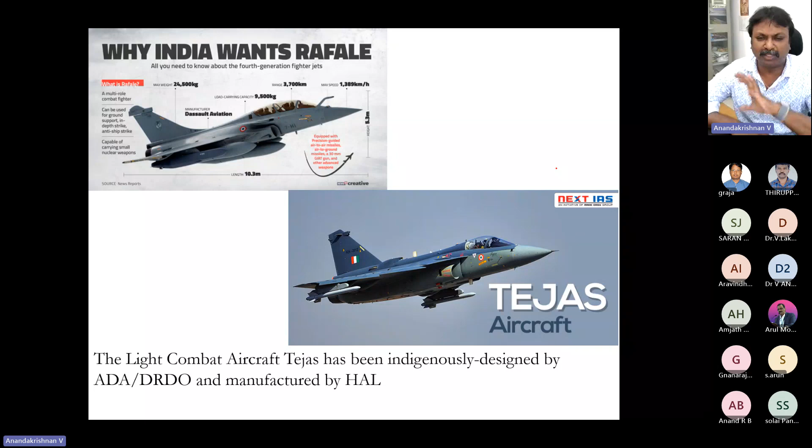The Tejas aircraft is a light combat aircraft, LCA, indigenously designed by the Aeronautical Development Agency, Defense Research and Development Organization, and manufactured by Hindustan Aeronautics Limited. A lot of DRDO labs are utilized in making a lot of research, building the total mission of this flying machine. But if you see in engineering, it also takes part in some of the financial things.

When you think about the economy of buying a Rafale or making our Tejas, there are a lot of comparisons done on the World Wide Web, and you have the liberty to Google and find out the difference between the Rafale and Tejas by performance. So in a way, some websites have given ratings.

But at the end, when you think about the cost of buying one Rafale, we ourselves can produce more than 4 Tejas. That is because we are not just buying the material, not only the engine, not only the machine, but we are also paying for the technology behind it.

At the end, if you also think about the engine, we have the Tejas aircraft, but the engine is not developed by our own defense establishment. The engine development is still going on, very slowly, over a very long time. It's not so easy for a flying machine's engine to get certified, so General Electric's engine is now being used in the Tejas.

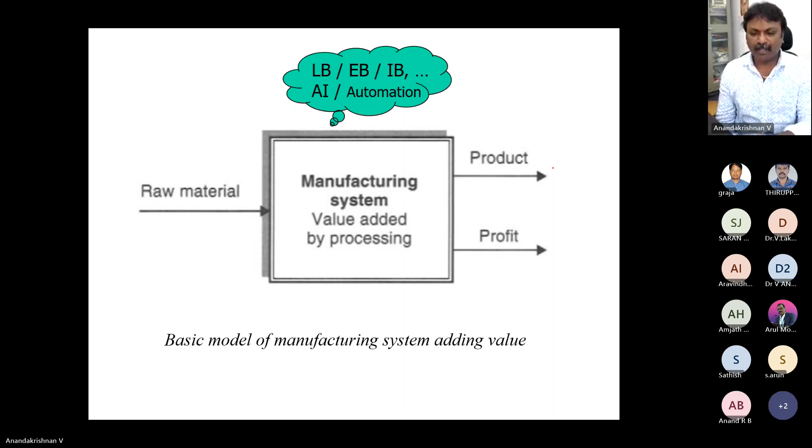So this is not by mere assumption. I've come across some books discussing the importance of manufacturing. Despite its decline in the 1980s, UK and US became fully developed countries in those years because millions of people were directly involved in manufacturing. Some statistics say from 1999, 20% of the GDP accountability for UK was given by 4.3 million people. Likewise, in the US, 17.8 million people were working in manufacturing.

Now the scenario has shifted. We don't want the number of people to be counted anymore. We need automation, full automation. You can manufacture any kind of thing with technology with reduced manpower. So it doesn't mean more people make a country developed now. Any country with the capability to automate industries, Industry 4.0, and give the highest productivity through manufacturing technology, that country will become a developed country.

So what is subtractive manufacturing? This is the traditional method. Actually, there's a small misunderstanding among young engineers. What they feel is that 3D printing is some heavenly process, that any kind of component can be manufactured by this additive manufacturing. I'm not going to accept such a hypothesis.

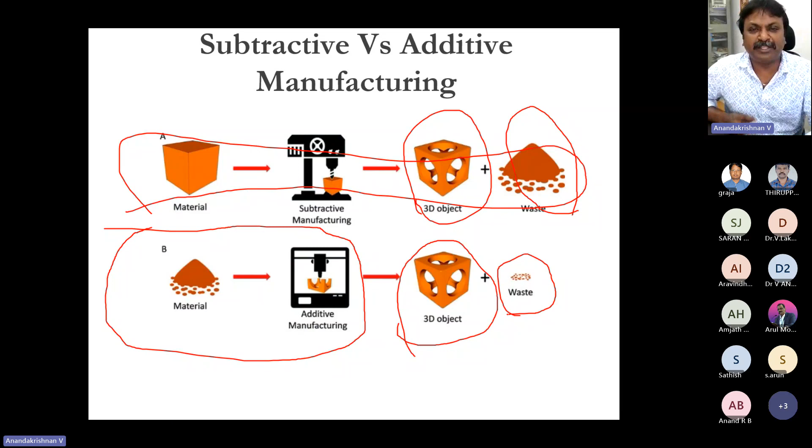Simply speaking, additive manufacturing is an appropriate name given for layer by layer building of material. The material may be plastic, metal, concrete, or anything. In the near future, like a CT scan can scan anybody's lung, if you have the biomaterial to manufacture any lung of a human, and a technology to deposit that material layer by layer, you can create any complicated shape, even the very fine details of the alveoli sacs and lung, whatever the airways, everything can be easily scanned and 3D printed.

The scenario is something we will very shortly face or see. To make that, you need a 3D model of the component. Whatever the component we are going to manufacture, we need a 3D model.

There are plenty of sophisticated software available, and there is even reverse engineering by which we can scan, make 3D cloud data, and create the component as any kind of three-dimensional object. Once these three-dimensional objects are obtained by means of a CAD model, we go for layer by layer slicing, and this sliced data is given as input to an additive manufacturing setup where the manufacturing can be done layer by layer. So this is how additive manufacturing works.

There are majorly, if you see, some process categories in additive manufacturing. One category is powder bed processes. Here the powders, meaning small particles of material, have particle to particle attachment made either by a laser source through sintering. Sintering means not melting into a molten state but a semi-solid state - you heat one particle, and another particle attaches. Sometimes we melt by laser melting, or we can go for electron beam melting. So by applying different kinds of technology, you can melt a small particle and join particle to particle to create one layer.

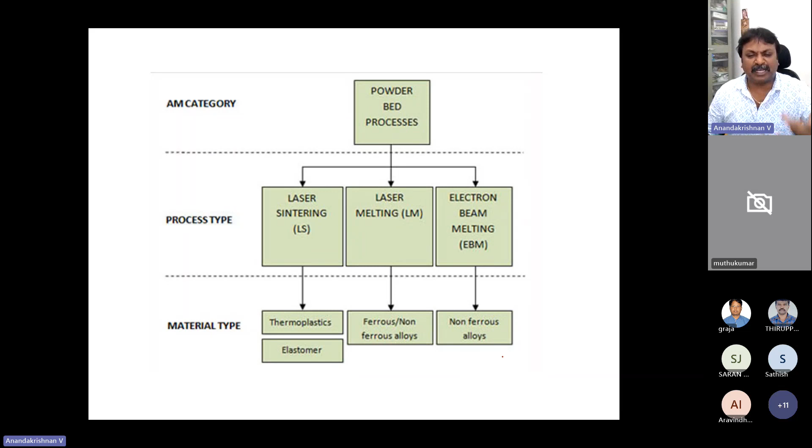Once one layer is manufactured, what do we do? We go for the next layer. So layer by layer additive manufacturing can be done with powders. Regarding material feasibility for this kind of process, it can use any kind of plastic, elastomer, or ferrous, non-ferrous material - anything can be done.

The second major category is material deposition processes. Here the material, sometimes by powder, you blow the powder - you have some space, you blow the powder, and then you define whatever cross section you want for one layer, blow another layer of powder, and create the cross section.

There are plenty of techniques available for additive manufacturing. Even a lot of new processes are being developed and patented all over the world.

Then again, we can create a wire by extruding it, and then melt the wire to a semi-solid condition, and deposit whatever shape you want to create a three-dimensional structure. We call this free forming also.

Sometimes we go for an extrusion process. You can have metal pellets, make the pellet go through a nozzle or extrusion chamber. It extrudes, making it into a semi-solid or molten condition of wire material, and then we can deposit it. Here also there is no limit on the types of material used - ferrous, non-ferrous, or thermoplastics. Any kind of thing can be done.

So I want to differentiate a powder-based process and a wire-based process. In a powder-based process, only very small components can be made. Usually small components, because imagine you are going to print a large engine block of a four-wheeler - what would be the volume of powder needed? Those powders have to be procured or manufactured by some other process.

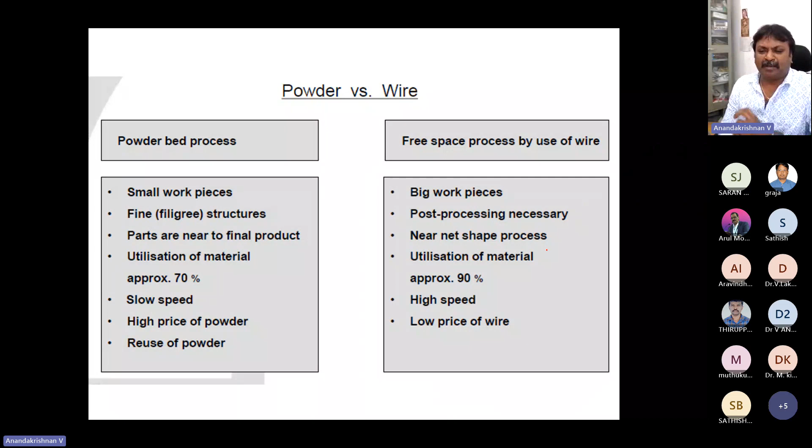So here, if you see this, when you go for a multi-layer deposition by means of a wire-based deposition process, these layers are not quite good in surface finish. You have a lot of extra projections. So it is not a good idea to get the exact shape this way. The control over a powder-based process is quite good, whereas with this wire-based additive manufacturing process, you need to go for post-processing, one for geometry, as well as metallurgically, we need to uplift the material for the required performance. When we think about it, it's very high speed because it can deposit 9 kilograms per hour, but its price is very cheap if you think about the cost of wire.

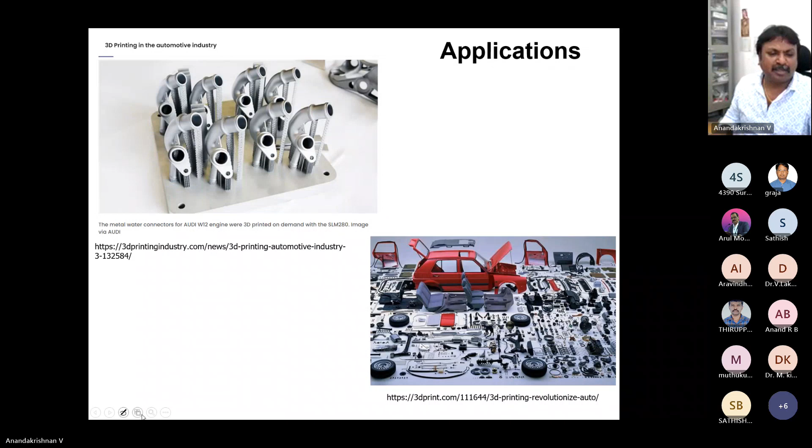If you see here, the metal water connectors for the Audi engine were 3D printed. You can see over here another major issue. If you think about here, you can see these honeycomb structures, or some structures constructed from the base plate to the component. Those are your support structures. Whatever the support structure, you need to design it depending upon the component's complexity and the plane of presentation of individual layers. We need to construct or prepare some support structure to overcome this kind of component issue.

So this support structure design requires a lot of software. I was also working with one of the scientists from C-MET to develop some of the support structure design software. Now, at present, for example, there is a software called Materialise Magics, sourced from Belgium. In NIT Trichy, we have a 3D printer machine for that. It costs around more than 10 lakhs for one version of the software. It helps you design this kind of support structure when you go for powder-based additive manufacturing. There are a lot more parts available to revolutionize additive manufacturing in automotive industries.

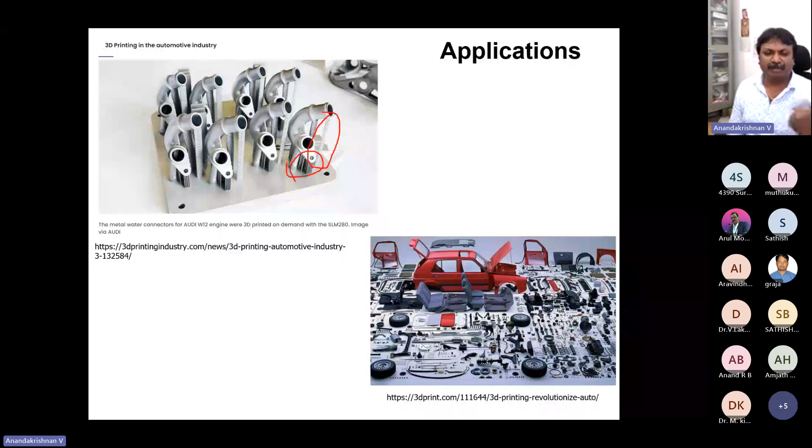When we talk about applications in case of turbine rotors in aerospace engineering, you see most of the repair works. Earlier, you can see over here, some repair works have already been done, right? Repairing that particular point and then again machining. You can also see some laser-based deposition taking place over here, and these are some of the wire-based deposition processes to correct the wear and tear of repairing a damaged part. And these are built up.

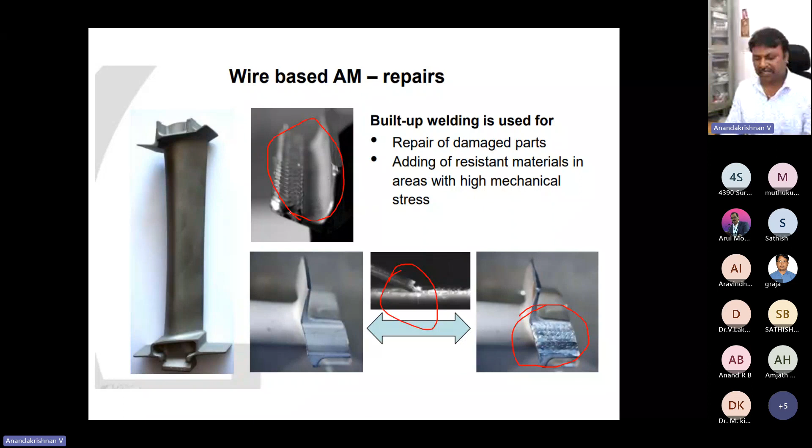This is an additive process. We are going to add some more material where it got worn out, and then we will deposit that material and then machine it. These are the things wire-based AM repairs have done. And these are some of the other areas of near net shape technologies, which can be used for manufacture, repair, surface treatment, or rapid prototyping.

So all these areas are being covered by this kind of additive manufacturing. Let us slightly discuss electron beam wire additive manufacturing. This is another part - wire powder-based additive manufacturing involves spreading powder and using a beam to create layer by layer.

Here we are going to introduce electron beam welding. We will have a wire feeder and a source of electron beam to melt it and deposit layer by layer, so that you can create whatever shape we want. So this is one of the setups, right?

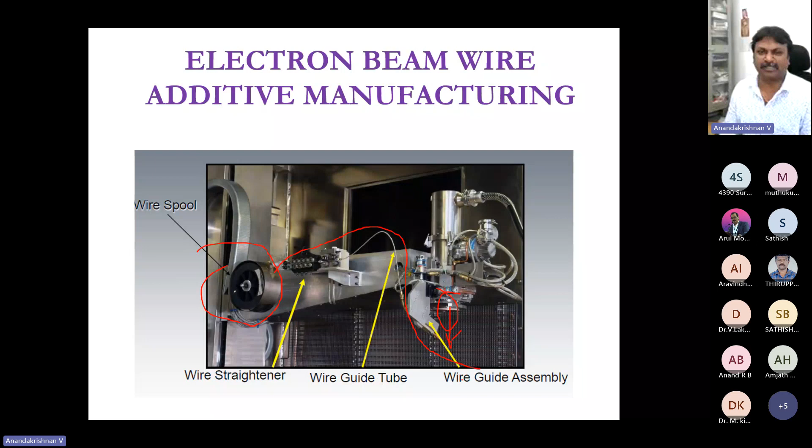A wire spool is available here. The wire is fed through some guideways and comes out, and we have the electron beam source focusing downwards. We have to have a CNC system to move your component in the X, Y, Z system, and you can also use multi-axis robots for making any kind of relative motion to obtain any kind of shape. It's possible with electron beam wire additive manufacturing.

The advantage of this wire-based process is, as I told, a very high deposition rate of 9 kilograms we can deposit. Moreover, when electron beams are used, usually the component is kept in a vacuum environment, which assures cleanliness. Most aerospace components and other highly reactive materials like titanium, if deposited inside a vacuum, will have a much greater advantage. It's an important factor essential for aerospace applications.

The disadvantage is the cost of this machine. For example, the machine I show here was procured at Gas Turbine Research Establishment, Bangalore. It costs around 17 crores to bring the machine onto the floor of that particular industry. So electron beam is costly equipment, and there's also the size of the vacuum chamber. Suppose your component is very large, like large engine blocks of heavy engines - you have to make the entire chamber vacuum, which itself takes a lot of time, and then creating the component inside. These are some of the disadvantages.

So a quite lower cost type of additive manufacturing can be performed by wire arc additive manufacturing. You can use a wire and deposit layer by layer by means of a MIG welding process, or you can have a TIG welding process - any kind of material wire melting and deposition process using a CNC system. You can usually create this.

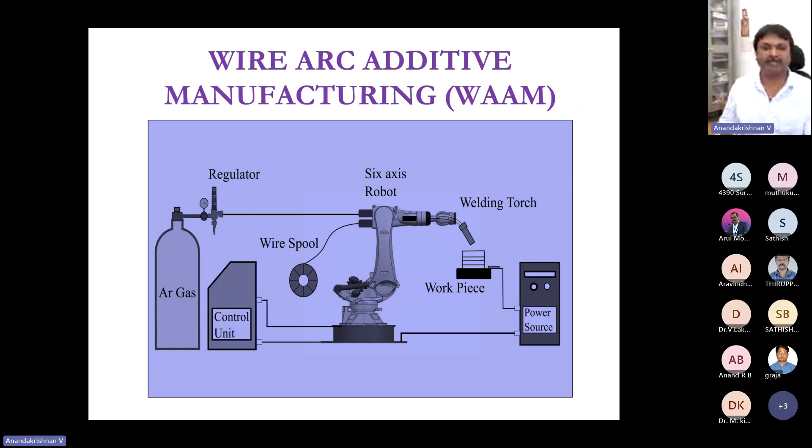The advantage here, compared with the electron beam process, is that we don't want a chamber or vacuum or this kind of environment. You can easily do it in open space - a very simple and cheap process.

And the disadvantage is properties non-homogeneity. As I told you, bead over bead deposition causes some non-homogeneity metallurgically, which modifies the properties mechanically - it gets modified. So the control of material deposition is another hectic process, right?

For example, usually when we deposit material to create these kinds of features, you can see these are wire-based additively manufactured compound features. You can see the waviness here, because layer to layer can be easily visualized. And imagine if you are going to manufacture a component of this size with this much surface waviness.

It cannot be directly used in most conditions, so you have to go again for a subtractive process. A subtractive process can never be thrown out of the domain of a manufacturing engineer. We have to depend on surface machining - again you have to go for rough machining and fine machining, and then surface finishing processes, super finishing process, or something else you have to depend on.

This is about the electron beam additive manufacturing in action in that particular machine, what I told. The process of wire-based additive manufacturing highly relies on the shape of the beads, right? We are going to create one bead of material deposition, then another bead of material deposition. In a way it gives layer by layer deposition - that's why the waviness.

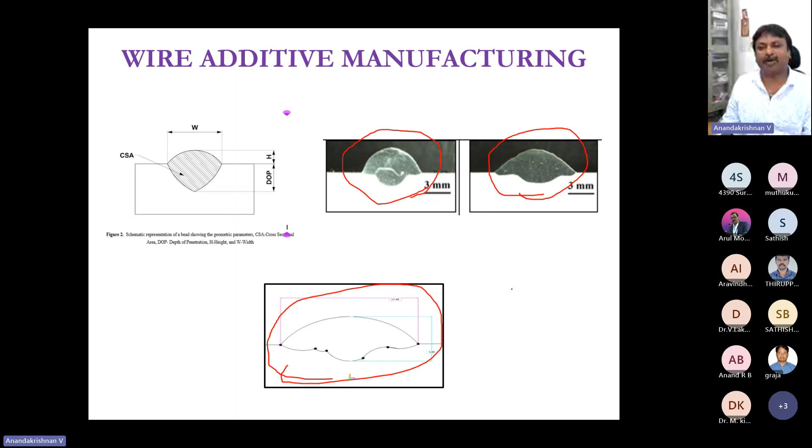Here are a few sample snapshots of electron beam additively manufactured layers. You see different parameters: parameter set 1 gives this kind of geometry, whereas parameter set 2 gives this kind of deposition for a single layer. Now look at the third one—it gives too much melting and dripping of the molten metal under the base.

So optimizing parameters to get a particular geometry is another task, and a lot of research is going on regarding what parameters need to be set for a given material to achieve a particular wall deposition width. You can see here, to obtain a component like this...

The first stage is creating the part by additive manufacturing, then going for subtractive manufacturing. Recent days, there are hybrid machines—in the same CNC system, one deposition head will come and deposit, then another machining head will come and machine. You can check through a lot of videos available on the web for that.

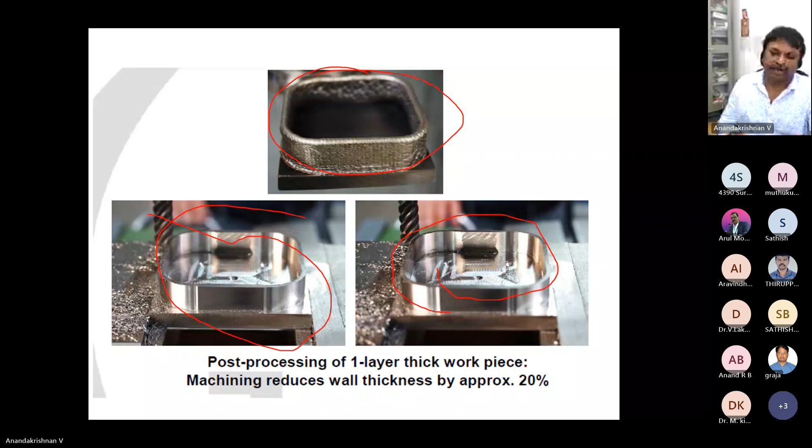Another challenge: when depositing material from left to right as shown on screen, if you check the height at the start point versus the stop point, there will be a difference, because we move left to right, stay there briefly, then go right to left, retracting the deposition torch. To overcome this, some people try directional change—first deposit right to left, then left to right, then right to left again. This is research work already being performed.

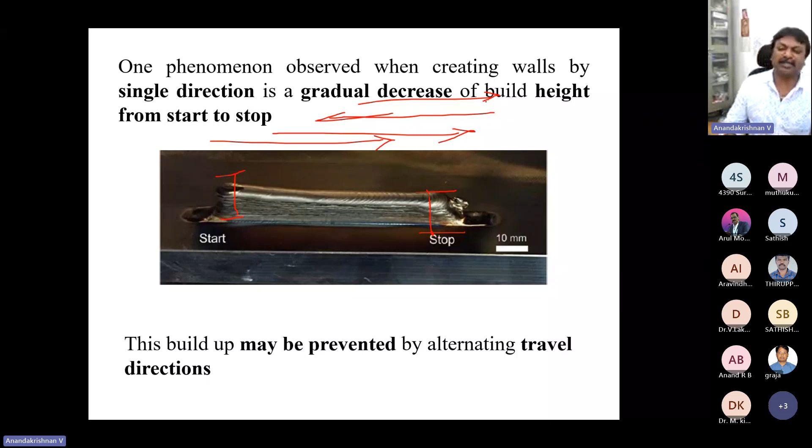Once the component is built, we wanted to find out how much non-homogeneity exists inside it. For this research, we used a CNC electron beam additive welding machine as the additive manufacturing setup, and these are its process capabilities.

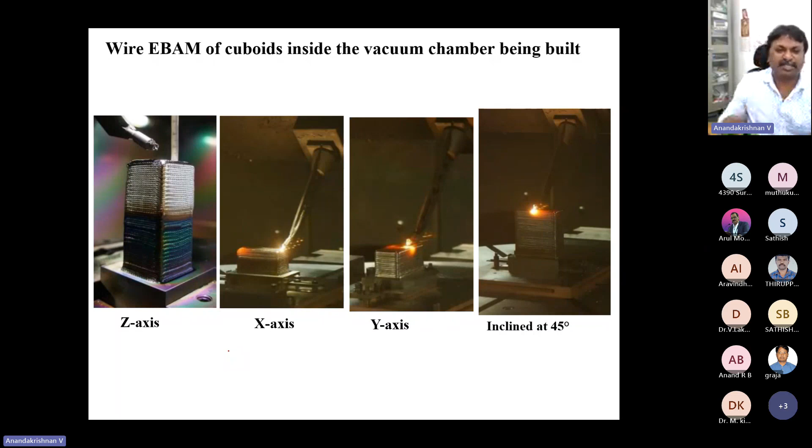Some components were made for a research project with the Gas Turbine Research Establishment. We extracted samples like this: one oriented along the z direction, some along the x-axis, some test coupons at 45 degrees to the xy plane, and some along the y-axis. So four sets of samples were extracted from these four different kinds of depositions, and these extractions were carried out.

You can see the build geometries built for various processes. Using a wire-cut EDM machine, we extracted samples along these directions and subjected them to tensile testing. The area under the tensile curve gives the toughness. There's a difference when the z-axis is the standing direction versus when material is extracted along the layer-laying, layer build-up directions.

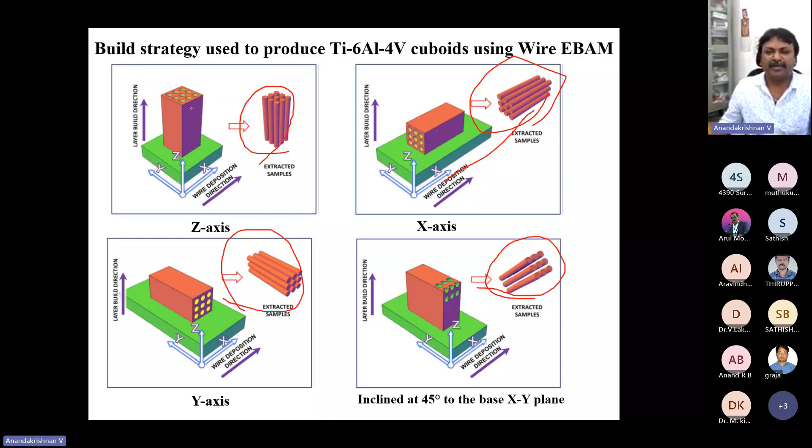So there are several reasons we wanted to find out why there's a change in different directions. For any component—say you want to build an automotive engine part or something else experiencing different kinds of forces—you have to be very careful about choosing what direction to orient the component, or in what direction to extract it.

So this is what I thought of discussing about wire-based. The next one is the Nirbhay, an unmanned air vehicle.

Most of you know about its range of 1,500-kilometer travel, and this is the engine available inside this. I'm not decoding anything else, it's actually available in Twitter and I'm using it for the explanation. So this is a small turbofan engine, the engine used in that unmanned air vehicle, that Nirbhay missile.

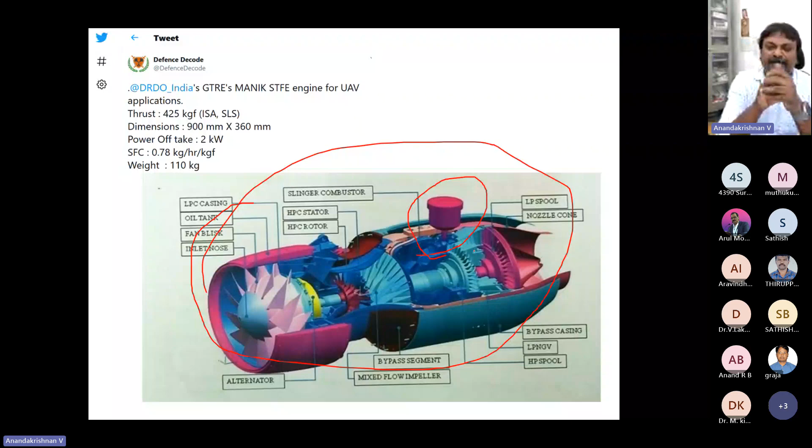Here you can see a box-like container, which is nothing but the starting nozzle. Usually for crank starting this kind of high turbo engine, we may use something like a propulsive starter. We have some propulsive material compacted in a small nozzle chamber, and then we ignite it, so there will be hot gas coming out with very high velocity, hitting on these rotor plates, and then the rotor will be rotating.

We need almost 30,000 RPMs of rotation of these kind of rotor blades for this kind of flying machine, where we are going to form the trajectories. I will play a small video for this one.

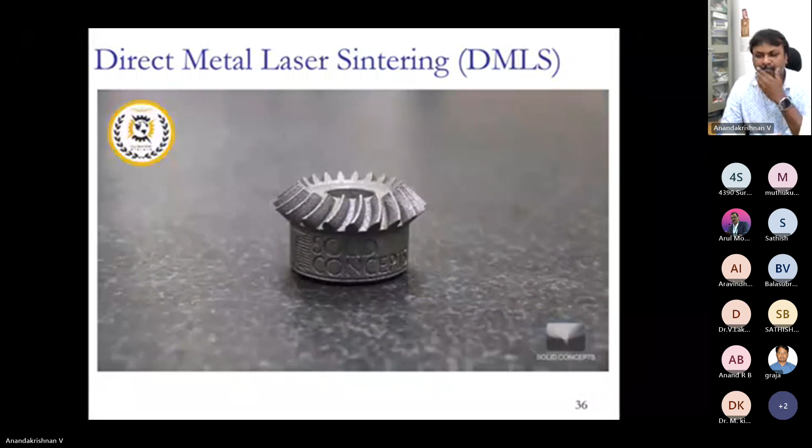That's the process by which most automotive and aerospace three-dimensional components are built. The video shows we give a command, we have the object sliced, and you can have the manufacturing. I was also happy to see that.

But NIT Trichy Center of Excellence in Manufacturing has got one 3D printer, and Dr. Duraiselvam, being chairman, purchased this one for some 10 crore rupees. There is equipment, but what happens when we go for 3D printing of whatever material?

One major thing is, in any additive manufacturing or 3D printing machine, whatever powder is provided by the equipment supplier, we need to use it. If you use some other powders, you may end up with different kinds of complications. One layer of powder will be some 40 micron layer - we create one 40 micron layer, then lower the bed and again create a 40 micron layer.

Suppose you see figure number 1 here - what happened actually is, during the halfway point, it got detached from the base and it got warped. The powder being spread by means of a very fine blade, which may be made of rubber or some polymers, and that wiping blade mechanism will get damaged. It may cost a few thousand, or it may go to lakh rupees for replacing this kind of equipment.

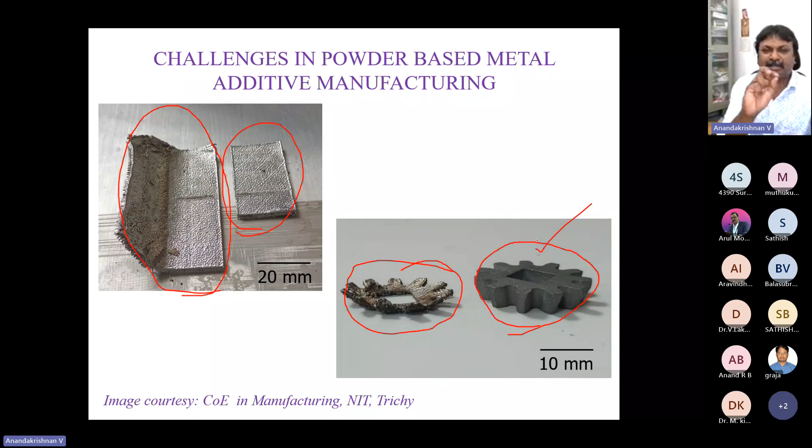So the parameter again is very important. These are some of the challenges in powder-based additive manufacturing. Hope I'm not taking too much time - I will slightly skip some of the slides because of the technical difficulties we faced.

One needs to understand the characteristics of the powder is very, very important. This additive manufacturing is nothing but an advanced process of powder metallurgy. Powder metallurgy process is a very good old process where powders are being mixed, and then whatever different kinds of components you want, it is pressed into the required shape.

Then it is kept inside a furnace for heating, to bond the powder particles. Thereby, large amounts of small intricate components have been manufactured for a very long time, using very little material, usually for automotive industries or household appliances and different applications.

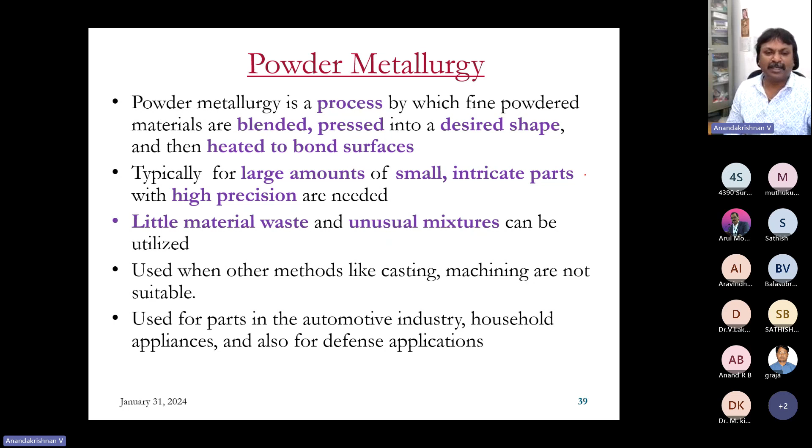This applies to metal powders which cannot be easily machined, melted, or cast, like tungsten carbide. These powders are even used in the Tiruchirappalli Ordnance Factory, the Heavy Alloy Penetrator Factory, where they use tungsten material to create rods for penetrators. These are made with powder metallurgy, and the process is well established: mixing the powder, forming it to the required shape, and then sintering it, heating it so the powder particles get fused, before going to different processes.

In powder-based additive manufacturing, the properties of the component highly depend on characteristics like the chemistry of the powder, purity of the powder, particle size, size distribution, particle shape, surface texture, and all these things.

Any alloy can be converted into powder, whatever the combination. But does a metal 3D printer have all the parameters for any kind of alloy mix? No, it is not 100% available. There is very limited research capability with a few of the 3D printers. They experiment to find out the parameters with which they can melt or add particle to particle, and they work on it.

Regarding purity: the process by which powders are manufactured is very important. For example, in an atomization process, molten metal is poured inside a small tundish, and through a small hole the molten metal flows. In a controlled atmosphere, if you spray cold air or water all around, you get separation of particles.

It's like blowing a candle - the molten wax spreads into small particles. Or sometimes you can have a consumable electrode, a consumable metal spun off in a spindle, with a non-rotating, non-melting tungsten electrode creating an arc. The material melts, and due to high rotational RPM and centrifugal forces, the particle disintegrates at the periphery, on the radial surfaces, and you collect it inside a chamber by cooling it down.

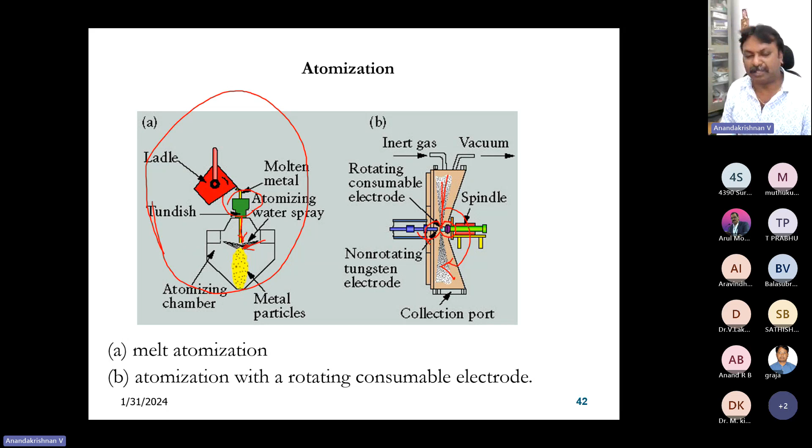So this is an atomization process. There are plenty of other processes like chemical reduction, electrolytic deposition, pulverization, thermal deposition, precipitation from solution, or condensation of metal vapors. Any metal can be converted into powder - this technology is already developed.

Depending on the process by which you create the powder, the shape varies. Some are one-dimensional powders - they may have an acicular shape. A chemical decomposition method gives you an acicular shape, an irregular rod shape, or a two-dimensional flake shape, while an electrolytic deposition method gives you a dendritic shape. Or you can have three-dimensional shapes like spherical, rounded, porous with small holes inside, or irregular shapes.

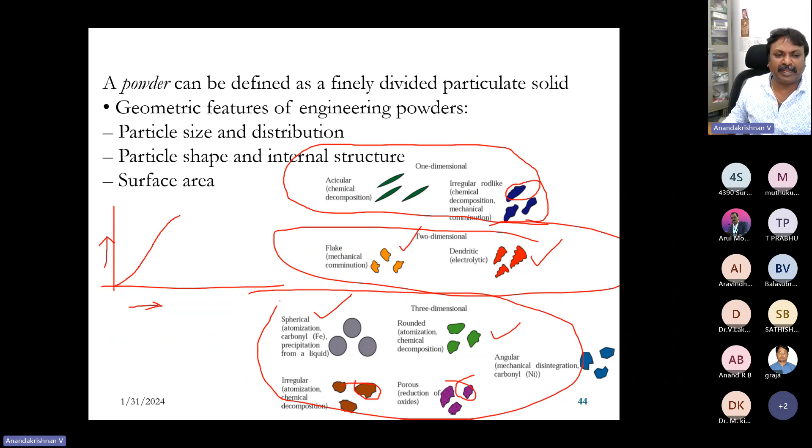If you plot particle size - taking the frequency or number of particles in a known quantity on the y-axis, and particle size on the x-axis - you should get something like a normal curve. What we need is small particles in little number, medium size particles in very high numbers, and large size particles in quite lower numbers. This gives a normally distributed particle size shape.

With adjustments: suppose you take a container and put larger size balls of the same size in it, you will have a lot of cavities, a lot of porosity. But if you spread particles of larger and smaller sizes together in a container, you can have uniform filling. This is what's called apparent density - how you fill the powder particles. You can easily imagine this one.

If you are spreading same size particles, or smaller to larger normally distributed size particles, the spreading will be more uniform. So how to manufacture it, how to find the size, how to mix it, how to bring it - that's why it is very expensive.

And the particle shapes matter - suppose one powder particle's position is different from sphere to sphere, so interlocking will occur. One particle needs to slide with the other particle. If it has crest and trough, irregularities on the surface, another powder particle cannot slide over that when you are spreading the powder inside a chamber. So this is very essentially important - the surface area, all these things matter about how you are going to spread the powders.

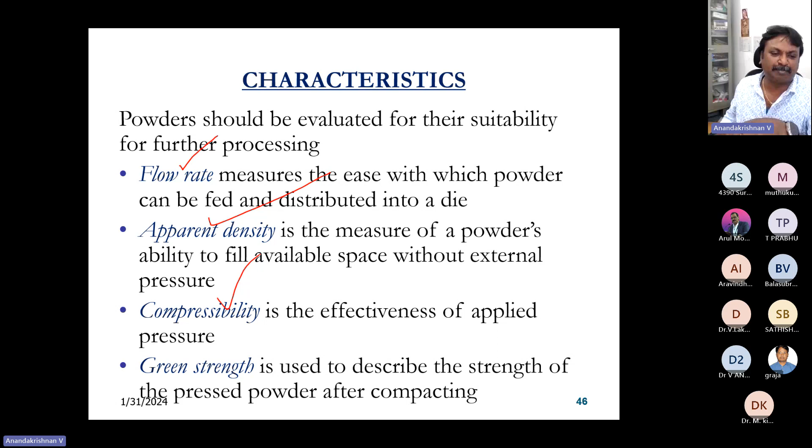Then mixing of this powder is again important. The powder metallurgy technique is a very good technique where you can add any kind of powders. For example, if you are going to create an alloy, there are limitations - you have to go for a binary phase diagram or a ternary phase diagram. What is the system, how to develop - all these things matter.

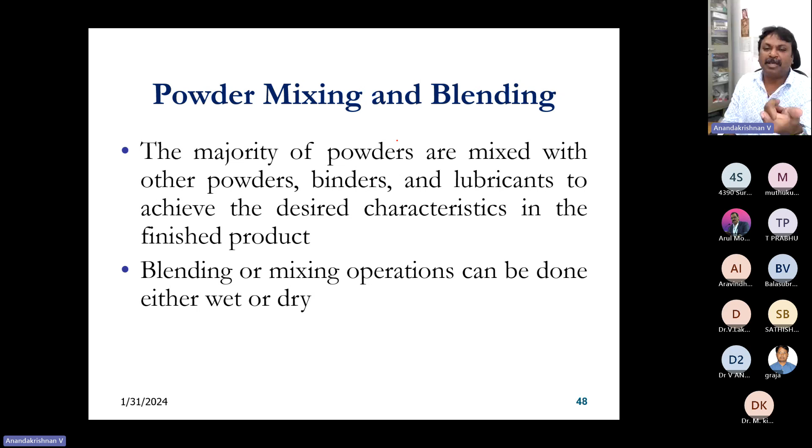But here in powder blending, you can take 50% copper, 50% aluminium, or 10% titanium carbide. You mix it together and create a consolidated shape by consolidating all this powder, and melt it at the lowest melting temperature with which it can sinter, to create components. So you've got to mix it uniformly - a lot of physical and mechanical properties depend upon the mix.

So in 3D printers, when you are using powders, we have to wear masks. These masks should protect against the powder particles. If the powder particles are less than 40 microns, they can easily float in the air. Usually nano powders can float in air. If you inhale it, it can go and soak into your alveoli sacs, leading to a lot of respiratory disorders. People may even die. So you need a hazardous environment setup - you've got to be very careful about that.

And then you cannot blend in air - sometimes you've got to blend it in an inert atmosphere. You may need a toluene-like liquid to fill. Then when we want to have a very good mix of this powder for different alloys we want to make.

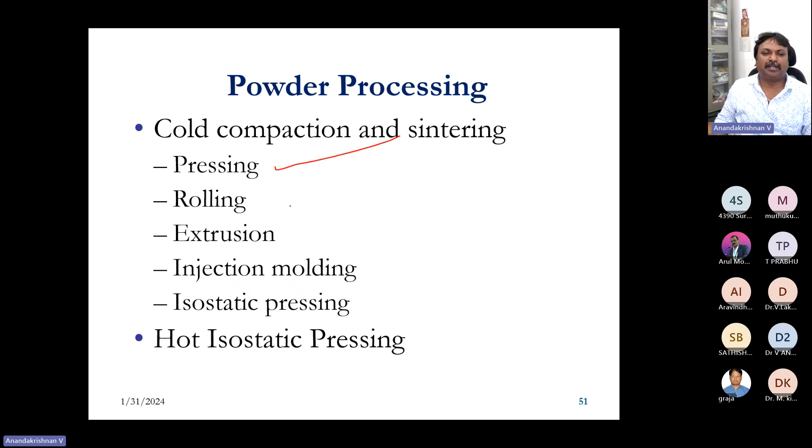So after the powders are mixed, usually in the conventional method, they press, roll, or extrude, injection mold, or isostatic or hot isostatic press it. Here are some glimpses of that.

So the loose powders are now subjected to pressure to create a component in the powder metallurgy technique, either using a mechanical press. For example, if you want to create a small spur gear with a helical hole inside, there will be an upper punch, a lower punch, and a die inside which you fill the powder. The upper punch moves down and the lower punch moves up, creating a consolidation of the powder inside, and then it is ejected.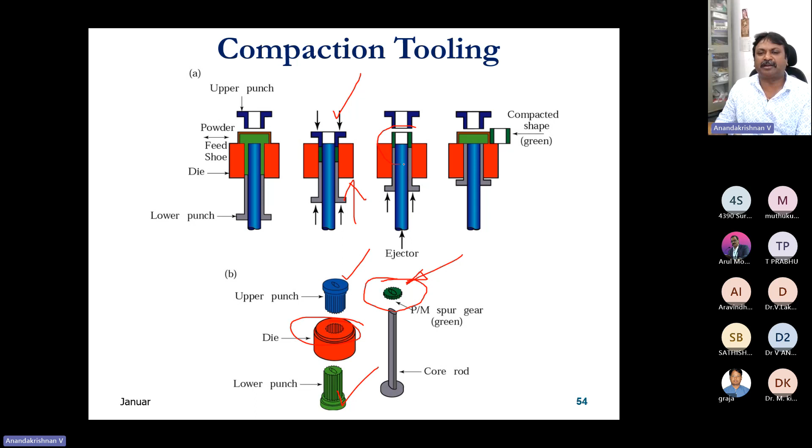I'll show the cycle: powder filling, compaction starts, compaction completed, component ejected, and then it is taken out. When you are stacking and compressing the powder inside a closed container, initially there are a lot of loose powders and cavities - pores - you can see. Then it gets restacked, and finally it will get deformed.

So the additive manufacturing setup usually is not only about powder spreading. Some of the technologies now under research involve rolling these powders to create a uniform thick layer.

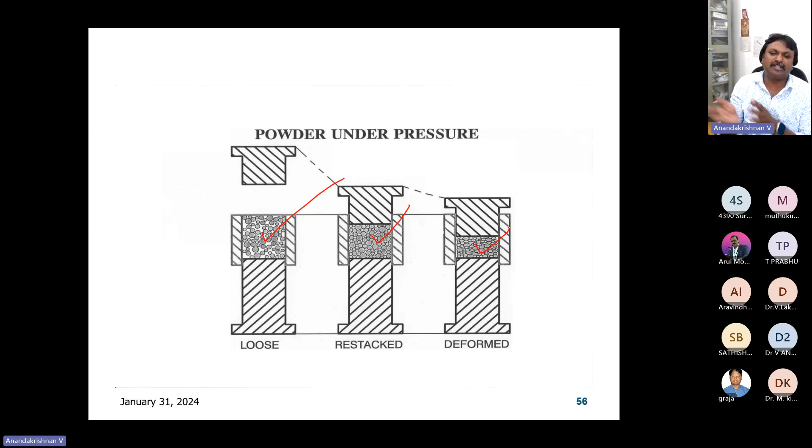So with 40 micron powders, you can roll the powder before it is being heated. This rolling-based bed fusion process is on the way, people are working on it. You need to understand, scientifically, this has a lot of difficulties or challenges in handling these kinds of small powders.

This is a conventional powder metallurgy compaction sintering process where powder is filled inside a container, a die, and there are relatively moving different parts. Why? Because if you apply pressure on a static powder from the top, the density will be higher at the top and poor at the bottom. If you apply movement from both the top and bottom, you get density variations along the axis, higher at the top and bottom, poor densification in the middle.

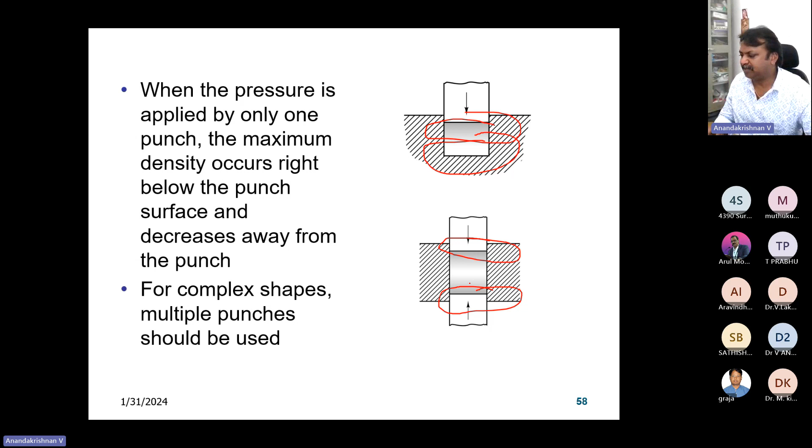This is how different die movements, punch and die systems, can help. Here there are 3 moving parts. This kind of die design can help create a uniform or homogeneous distribution of particles, so that porosity doesn't form at any particular location.

For that you can go for isostatic pressing. You can put it in a chamber, apply pressure all along, and fill the powder. For example, this is a small tube component. This central core rod is meant for creating the hole, with a stopper at the top and bottom to hold the powder inside this flexible tube.

The powder is kept inside a closed container where we increase the pressure, cold isostatically pressing it, and create the component.

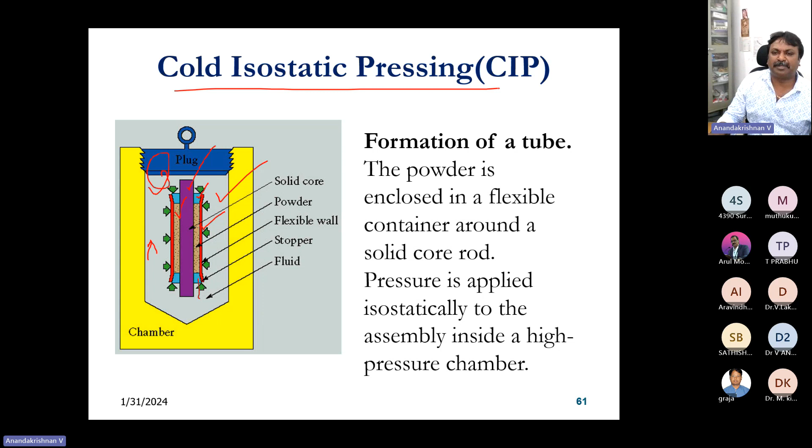Instead, people are making use of hot isostatic pressing. The powder is filled in the required shape of a can, and then it is kept inside a fluid bath where temperature increases and stays for some time, then is reduced, while pressure is also simultaneously increased, kept for some time, and then reduced.

So hot isostatic pressing - here I want to mention one important point. Powder-based additive manufacturing components cannot be directly used, because particle sizes are different. Spreading of the powders can create cavities, and layer to layer there may be non-uniformity in powder particle distribution. So under that condition, there will be some porosity, and you usually cannot have 100% densified components.

So what they do is take the component and put it inside hot isostatic pressing. After the component is removed from the base structure, they put it in and do a HIP process - hot isostatic pressing - increasing pressure and temperature so the component becomes uniform, with homogeneous properties in all directions. Only then can it be used for high wear-resistant components or bearing materials.

Powders can also be converted into the required shape by means of rolling. For example, you can have 2 rolls, and the powder can be fed in between the rolls, creating whatever cross-section you want.

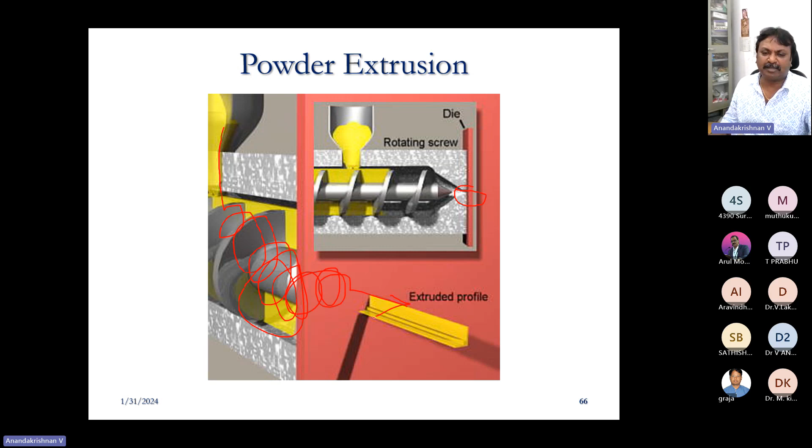Or sometimes you can pressurize the powder through a screw conveyor - this is the powder extrusion process. The powder can be extruded through a hole; it gets pressurized because of the rotating screw mechanism, and comes out in whatever shape you want.

Or sometimes people are thinking of depositing one powder mixed together with another powder to create a deposition. There is another additive manufacturing approach - instead of heating the component and joining it at once like with a laser or electron beam, there are developments where you can use polymer jets to attach particles to particles.

For example, a glue-like structure, you can attach particle to particle. So the 3D component has all the particles together by means of a temporary joint, using some adhesive or material. Then you put it inside a furnace and heat it to 70 to 90% of the melting temperature of the material, for half an hour to 8 hours depending upon the size, in an inert atmosphere. The particles get attached together - that's called the sintering process.

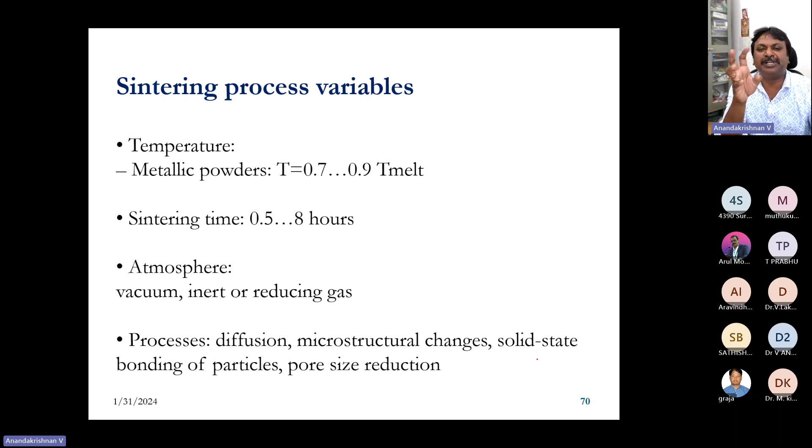So what happens here? When powders are separated by free spaces in the initial condition, at the contacting point some melting happens because of heat transfer from one particle to another. It loses its shape, and finally most of the free spaces close up. The particle sizes and shapes get modified, and finally you get your component with a fully dense nature. So this is how particle to particle sintering works.

Now people are doing research related to the particles. For example, if you have two particles together and heat them, there may be intersection - particle to particle melting happens at the point, and the center distances reduce because of the protrusion of one particle into another. So in this case, if this kind of melting and semi-sintering takes place, your component may lose its shape and size.

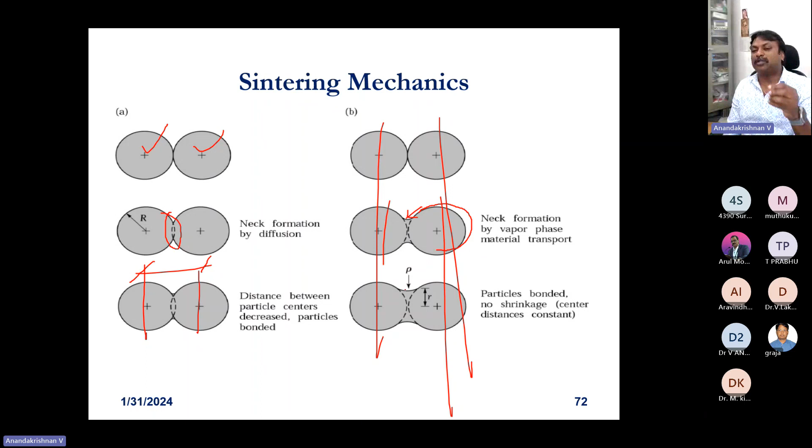Whereas this is another way of doing it - here the center distances are not disturbed at all, only the outer layers of the particle get melted due to surface tension, forming a meniscus that fuses together. For this, people are working on coating metal particles with a lower melting temperature material so they fuse together - it's still under research. Coated powder particles can be used for additive manufacturing, but to my knowledge, nobody has done it yet.

So the advantages of these conventional powder metallurgy processes are elimination or reduction of machining, high production rates, complex shapes, wide variation in composition, wide property variations, and elimination of scrap. The disadvantages are inferior strength because of porosity, high tooling cost, high material cost, limitations on shape, dimensional changes, density variations, and health hazards.

So this powder-based additive manufacturing is not a latest thing, as many new students think when they are running after this technology. If you visit most undergraduate student projects, they will say, 'Sir, I'm going for 3D printing' - either polymer 3D printing or metal 3D printing. Maybe the technology is different, but the concept isn't new.

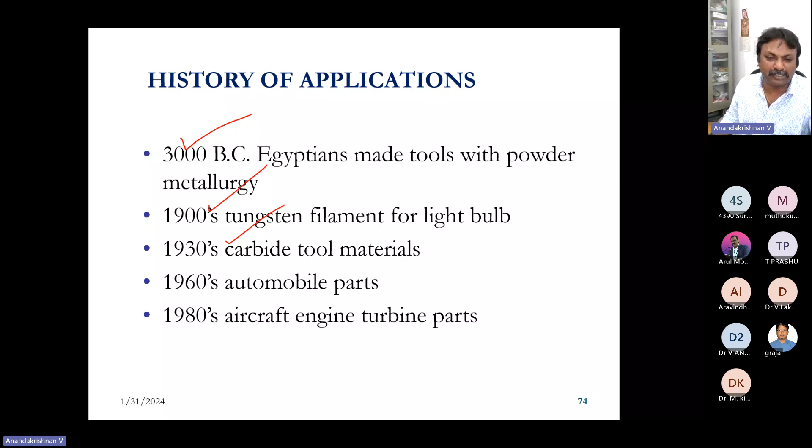In 3000 BC itself, Egyptians used powder metallurgy techniques, taking the powder base and creating shapes to make tools. In the 1900s, tungsten filaments; 1930s, carbide tools; 1960s, automobile parts; 1980s, aircraft engines. Now GE has printed its own variable density 3D printer.

What is this variable density 3D printer? For example, we have a structure - let's take a small example of this water bottle. If I need some strength in the base, I can print it with high density. And if I'm not interested in too much strength at the top, I can print it with a coarser pattern so that I have a lot of pores available. I can reduce the density at the top and increase the density at the bottom. So density variations can be incorporated based on how many particles are attached nearby in the vicinity, and you can create any kind of variable density 3D printing this way.

So you can do topology optimization this way. If you do that, almost 30 to 40% of the weight can be reduced in this engine. They have attempted and achieved more than 40% reduction in weight, because of which you can put that 40% weight savings of the engine into the carrier instead.

So for any framed structure - for example, in automotive design - you can understand where the forces will actually get distributed during a collision. Those areas you can make stiffer, with higher strength or higher density. And there are some aesthetic shapes where no impact force is going to occur - at those places, you can have coarser 3D printed components.

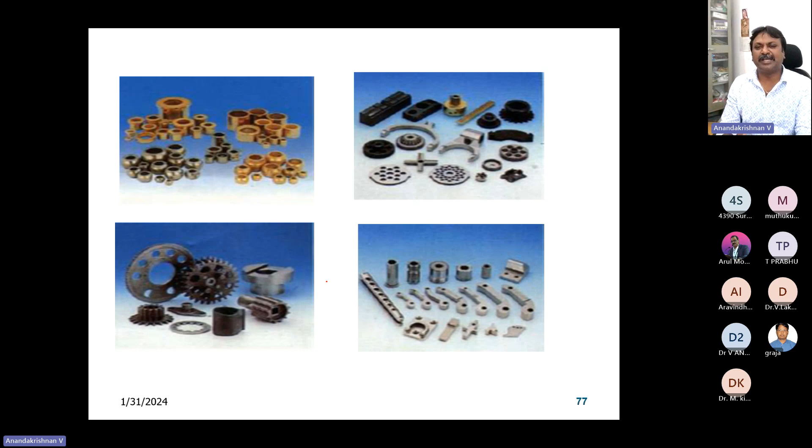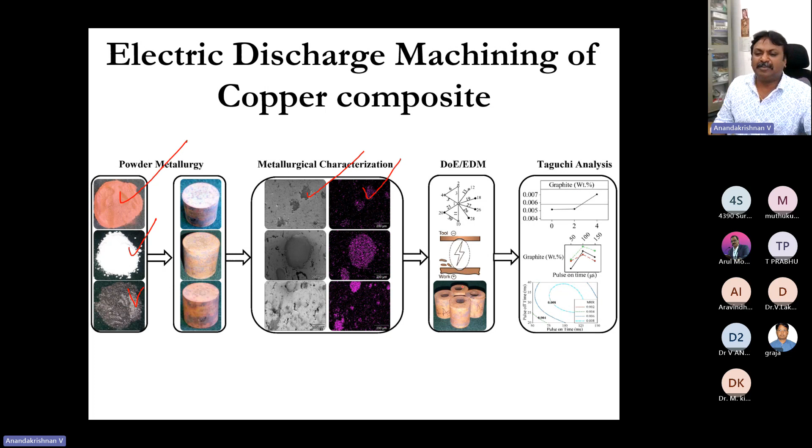Along with some of our research team, we have also done some powder-based compaction sintering process. We created some copper, titanium oxide, graphite powders mixed together, and created components which we analyzed with scanning electron microscopy. Then we used it for electrodes for electric discharge machining, and these are some evidences of the composite, metal matrix composites that have been made. We found a lot of property improvements when we include these additional second phase particles.

A lightweight particle is reinforced with a hard particle, a high stiffness or high wear resistant particle, so that we can improve the workability or endurance life. We did different kinds of wire electric discharge machining as well.

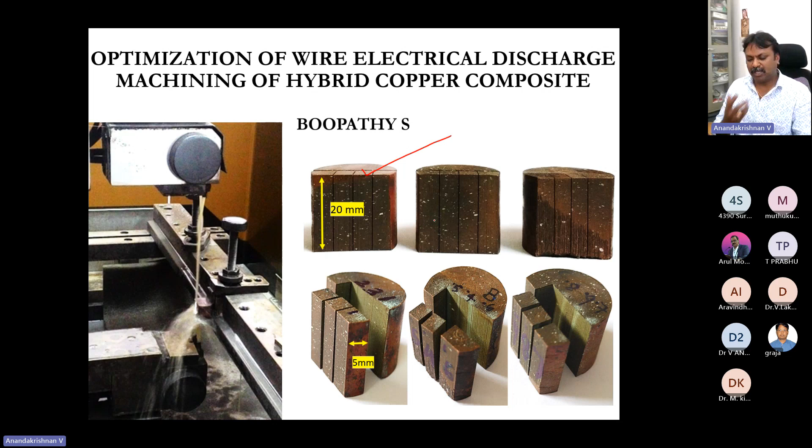So now if you have a complicated component made with a complex material, how do you cut it? If you use a wire EDM machine, usually the wire keeps breaking because of the non-homogeneous materials. So we did some research on how to cut it. The complexity arises when materials get complex by adding more than one kind of material—then the machining process also gets difficult.

Even I encountered some of this during my IIT interview—they were questioning me about the idea of creating a composite material, a metal matrix composite, where more than one material is mixed. How do you make a 3D printing of that? It's again a challenge.

Some of my research students are working on wire additive manufacturing. They create a composite wire, and then use the wire to make the depositions—it's also possible. So 3D printing, as I told you, is not a newer process.

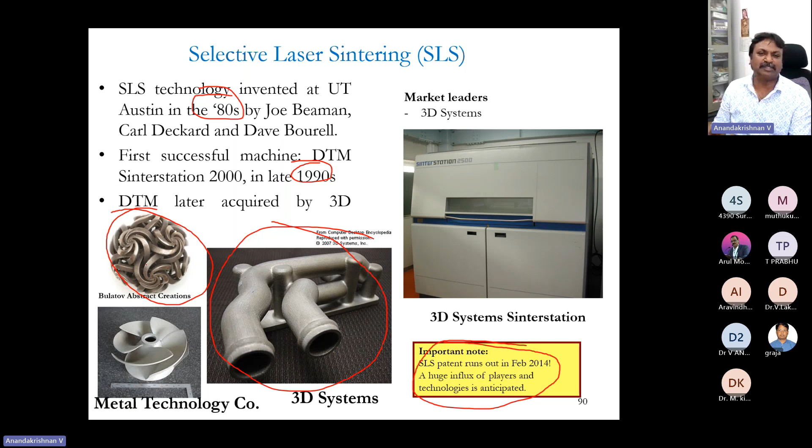Even in the 80s, and you can see in the late 1990s, there were machines called 3D Systems Sinterstation systems. These are some SLS patent runs out in February 2014. These are some intricate shapes you can create that you can't even imagine—no other process can be used to make this kind of very complicated shape. To show its complexity, this was printed using a selective laser melting sintering system.

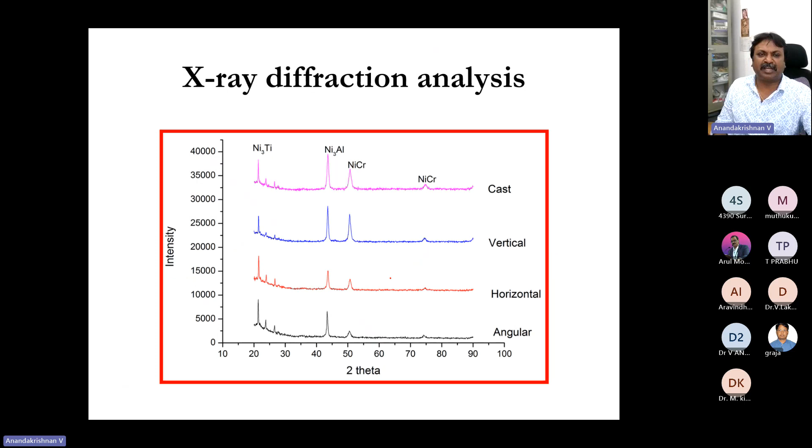The production department in Trichy, along with myself as PI, took up a project on the starter nozzle I mentioned earlier in that engine. That starter nozzle has to withstand around 2000 degrees centigrade in a convergent-divergent nozzle. We did some analysis by printing the component in horizontal axis, angular axis, and vertical axis, and then did X-ray diffraction analysis, scanning electron microscopy analysis, energy spectroscopy, and elemental analysis.

Based on that, we also looked at the measured density versus theoretical density, finding the relative density of components printed horizontally, vertically, and angularly, and compared them with the conventional investment casted component. That starter nozzle is a complicated shape, earlier made by the investment casting technique. Because of its complicated or intricate shape, when 100 components were cast, only 8 qualified the dimensional measurement. So they thought of going for powder-based additive manufacturing instead.

We took this as a project to find the feasibility of additive manufacturing for the manufacturing of that starting nozzle. This is a project worth around 10 lakh rupees for 18 months.

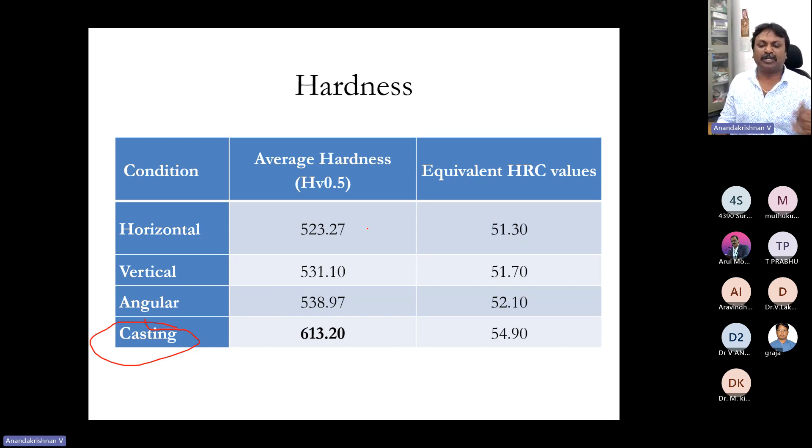So these are the different hardnesses we get. Here the casting wins with the higher hardness, right? Then we went for tensile testing for the horizontal component, vertical component, angular component, and investment casted one. And here what wins, right?

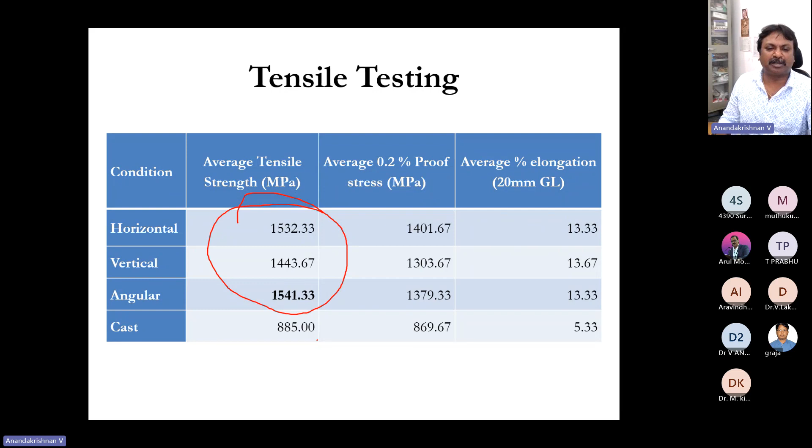You can see the tensile strength of the 3D printed components are almost nearly twice that of the casting. And the average elongation, percentage elongation, is also very high, more than 2 times. So it's a very highly recommendable process by which you can go for additive manufacturing.

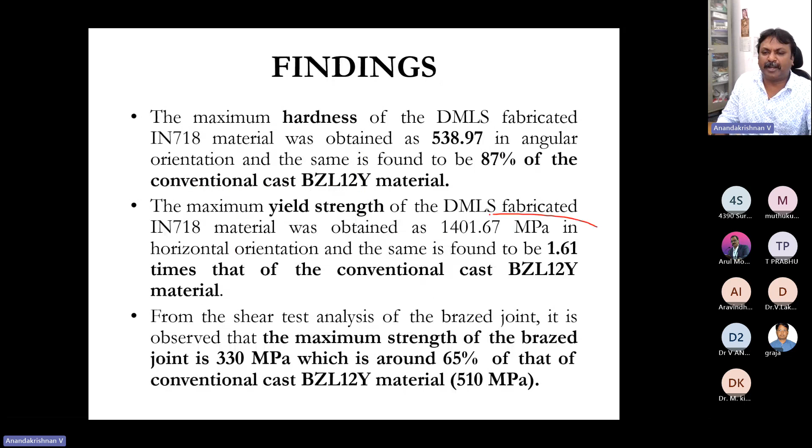We have also found out the reason behind the additional improved tensile properties of these 3D printed components. We investigated the fractography from the fractured components, and it has been reported. As I told you, the material has 1.61 times the yield strength compared with the conventional material. And these are some of the research works we undertook based on this additive manufacturing.

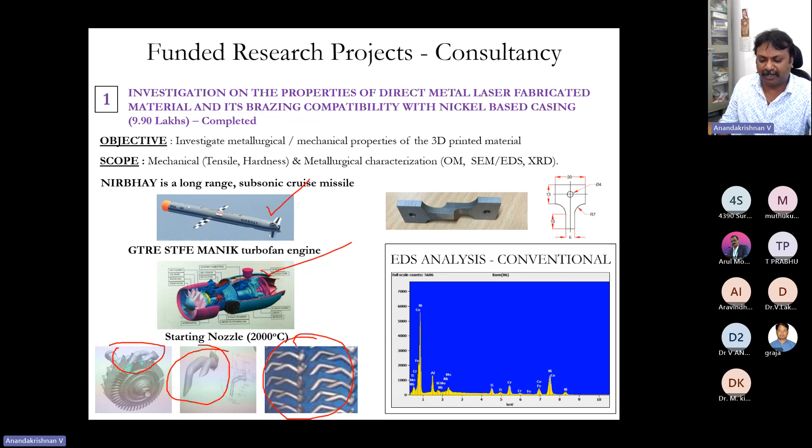You see this, that's what I told about the small turbofan engine for this missile, and this is the turbine blade, turbine rod, and you can see the starting nozzle's shape. These starting nozzles are manufactured by investment casting, and they find it difficult. When it is 3D printed, then you can easily obtain a lot of acceptance. This is one kind of work.

And there are complications with this kind of additive manufacturing. After making additive manufacturing, if you want to make some cutting process, we can rely on abrasive water jet machining. This is another important work.

What I want to show is an aircraft engine blade. This aircraft engine blade, the drawing is shown here. What you see here, inside this, you cannot see by naked eyes, there are small 3 holes over there. Inside this structure, there are plenty of hundreds of holes.

When this turbine blade is rotating, cold air will get inside this particular hole, and it will circulate here. You can see the cold air going inside, circulating, and coming out, so that the blade gets cooled. So for this, after making the process, they want some of the holes to be blocked by means of powder, compacted, and then by a brazing process.

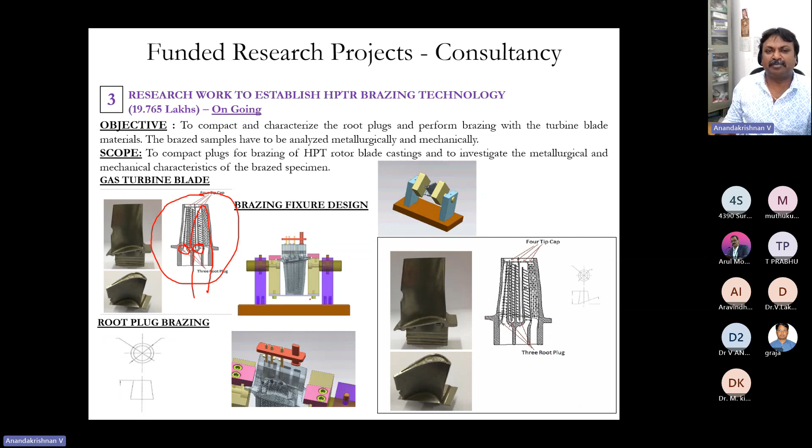So we have taken this project for around 19 lakhs from Gas Turbine Research Establishment, Bangalore. And this is a fixture design, and we plan to make this. Think about this as the pellets we have to make with different kinds of composition of materials.

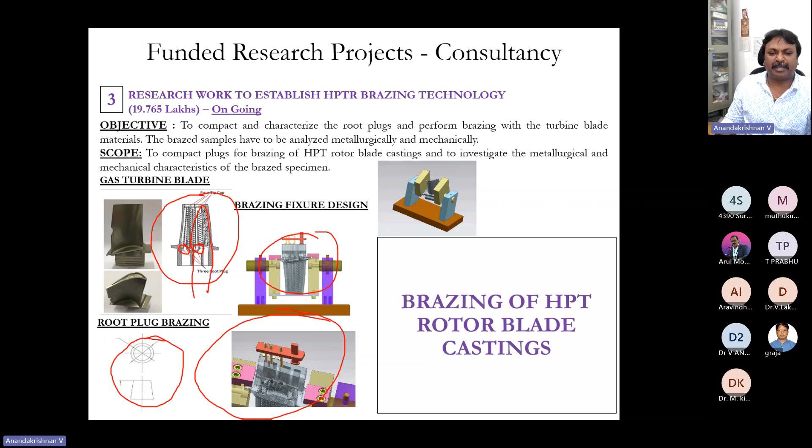So this is a currently ongoing project. Actually, we are shortly closing that particular project. And when you think about it universally, there are challenges. Why do these challenges come to picture?

There is a lot of material development being carried out all the way. You can see polymers, metals, and polymers can be combined to give some different properties. You can combine metals with ceramics, or ceramics with polymers. These are more than one material combined together to give the desired properties, what we call a composite material. In these composite materials, there are a lot of researches going on, how to manufacture the composite material.

And if you manufacture, as I told about in additive manufacturing, if I'm going to mix for example aluminum and titanium carbide inside, what the melting or parameter is going to be set by the laser to create the component becomes a challenge. And again, if these composite components are made, how to make a hole or something else?

There are 10^6 kinds of materials, and each individual material has hundreds of properties, like density, coefficient of thermal expansion, compressibility, a lot of things. And there are a lot of processes, you need to choose the particular process for making the component as required. So the challenges are there. If you overcome any one of these challenges, it can lead to innovation. So challenges are there.

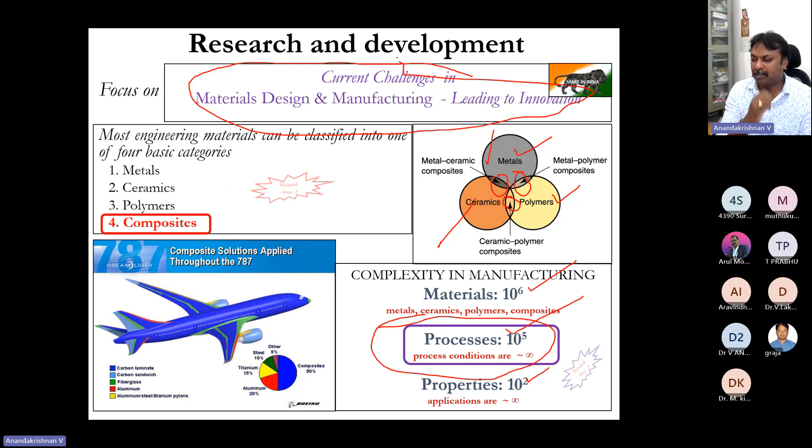If you do the challenges by means of your routine work or any kind of new idea, combining and hybriding different kinds of technology together, you can end up with these kinds of innovations. So these are some of the other research areas.

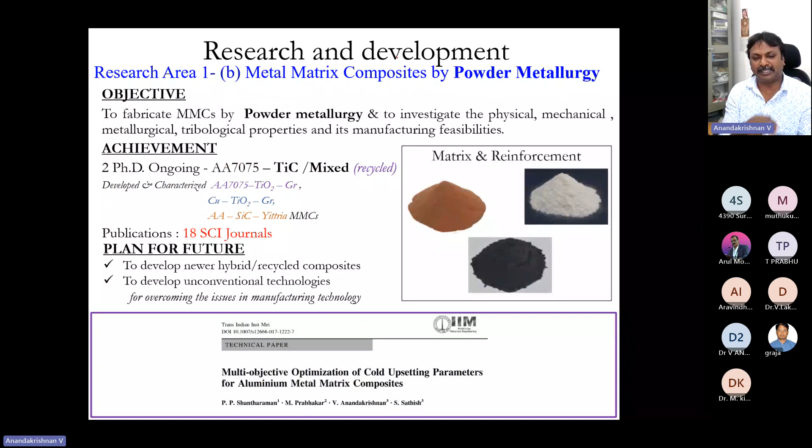What we did was a metal matrix composite by powder metallurgy. It's one of the cheapest techniques by which you can introduce two different powders to make composites. A few of my PhD students did their work on this. We created some powder metallurgy based metal matrix composites, and then, so what we can do in future, you can develop new materials using recycled material, and you can develop unconventional technologies for machining that.

So new material comes, then there is a new process needed to be identified for machining. And by friction stir processing also, one can create powders fused inside any kind of material. And there, to develop newer materials, we can use additive manufacturing; friction stir processing is another part.

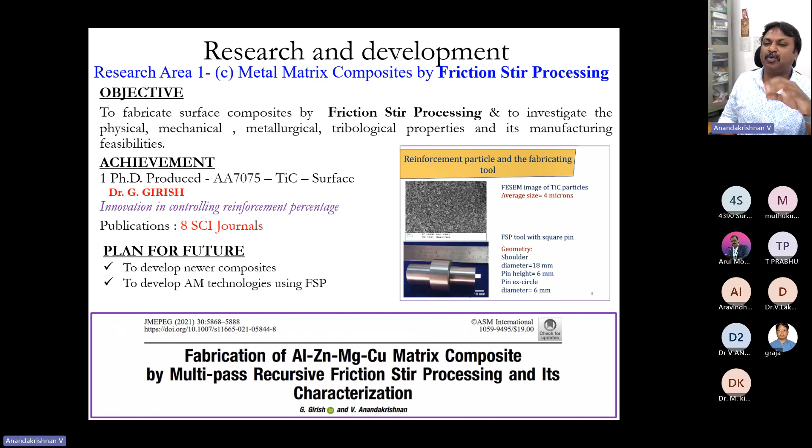You can have one sheet of material or one piece of material and another piece of material. You can use stirring to merge or fuse these two materials, and then keep another piece of material and do any kind of sandwich. This friction stir processing is usually best for friction stir welding, or better suitable for joining different, dissimilar materials.

So you can have one layer of aluminum, one layer of stainless steel, another layer of aluminum or magnesium, like that. You can have different kinds of layers of material to give whatever requirements you want.

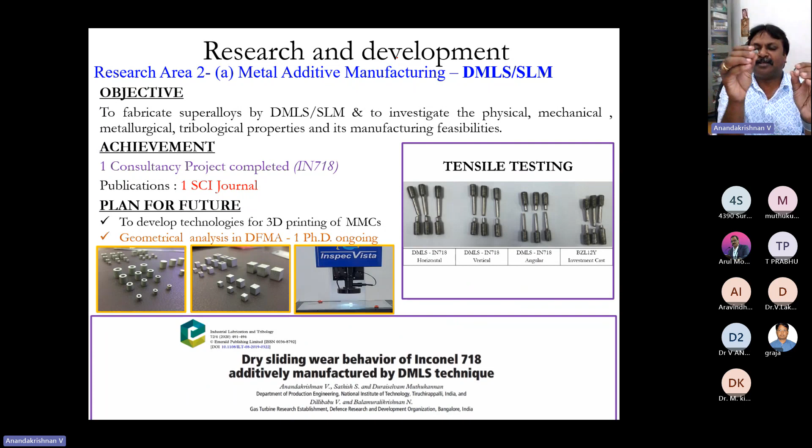We created a nut and bolt using this powder-based additive manufacturing, and we tried to make it work. You cannot make the nuts and bolts work together like what you have machined. This is because the additively manufactured component will not have the surface properties like the one we do in a conventional machining process.

So this is how we are doing some research with surface properties, the directional oriented surface properties. Very few studies have been done on this. So you can do additive manufacturing and evaluate the dimensions, measure the dimensions, and then base it on the surface roughness and the dimensional variations.

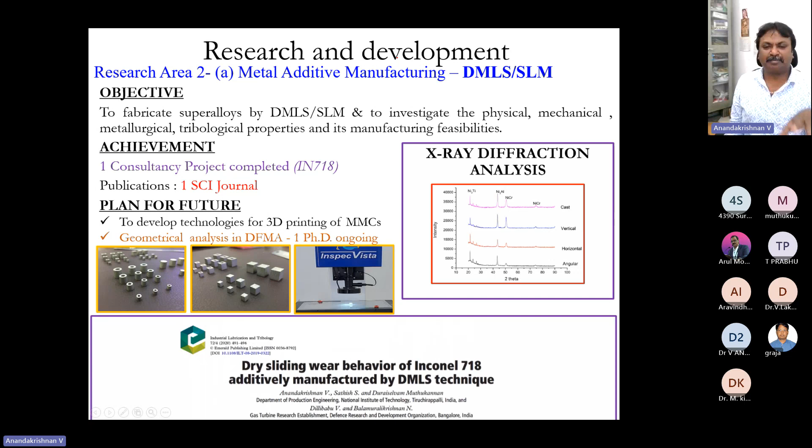There are some machine learning algorithms or AI systems being used nowadays to predict: if I use this particular parameter, what will be the width of deposition, so that you can control the flow of material to create whatever kind of geometries. That is another area, so we can develop a lot of these kinds of things in future.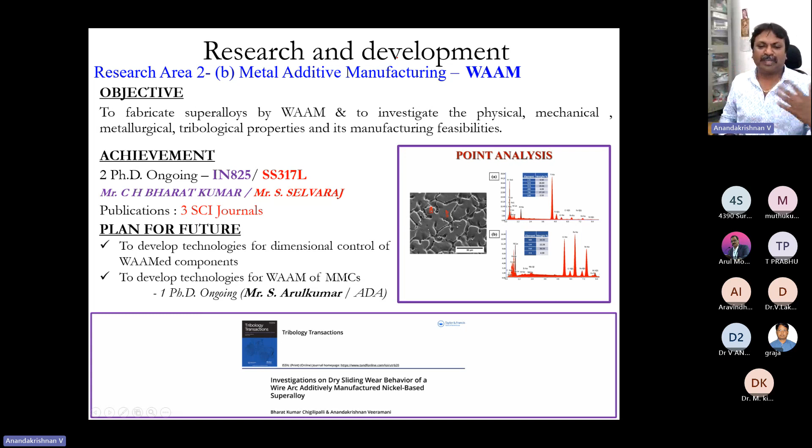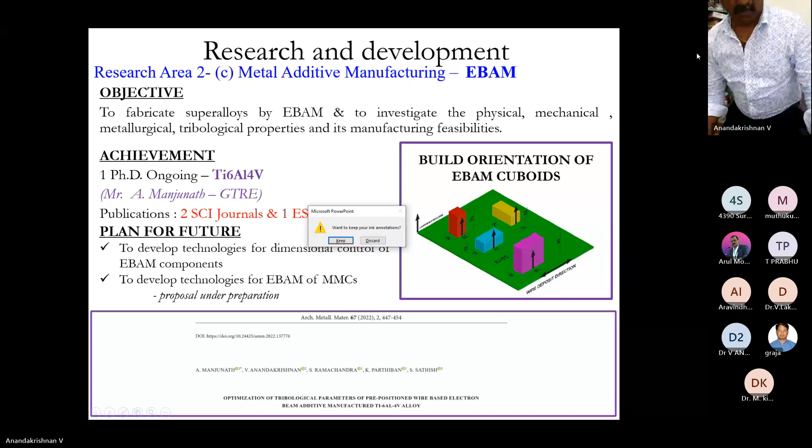And again, electron beam additive manufacturing also has the same kind of issues. If you just look at electron beam additively manufactured components... this is again additively, electron beam additively manufactured components.

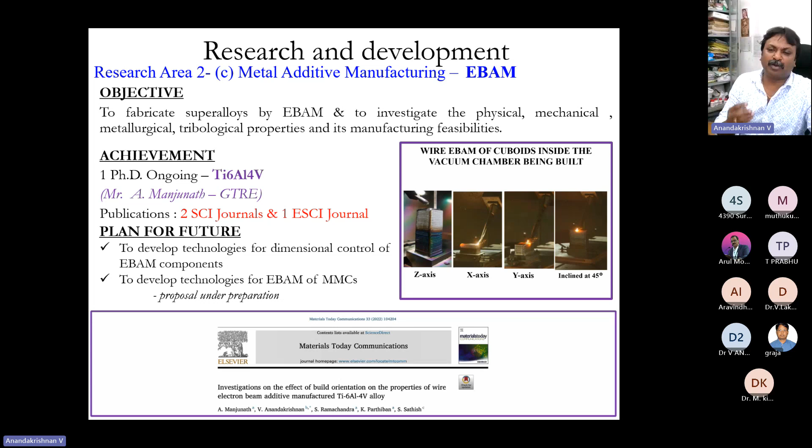You can see the waviness, right? You can see this is not so smooth here also. So there should be some technology to control these dimensional properties of electron beam additive manufacturing. Or if you want to make composites by means of electron beam additive manufacturing, also there are a lot of openings.

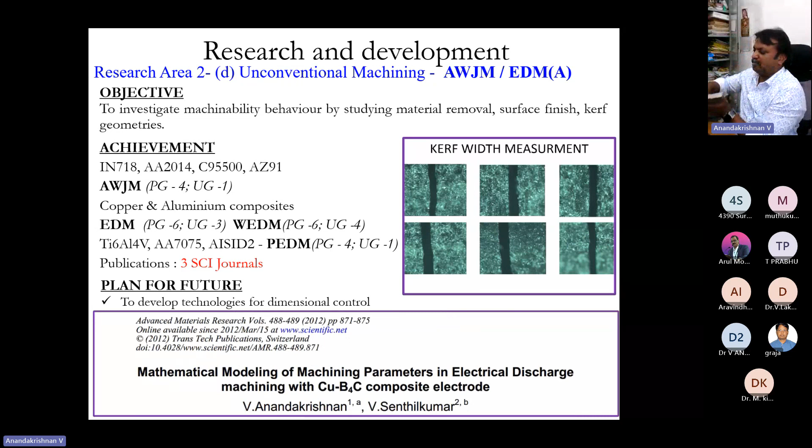And then finally, not all features can be additively manufactured. Sometimes after making this kind of additively manufactured component, when we take it for cutting a sample, even then we cannot cut it. So we need to understand how to machine it, how to cut it to the required shape after deposition. Then we can use unconventional machining like abrasive water jet machining, electron beam machining, or electric discharge machining. Usually even a wire cut EDM machine won't work on that, so our wire EDM operators are afraid.

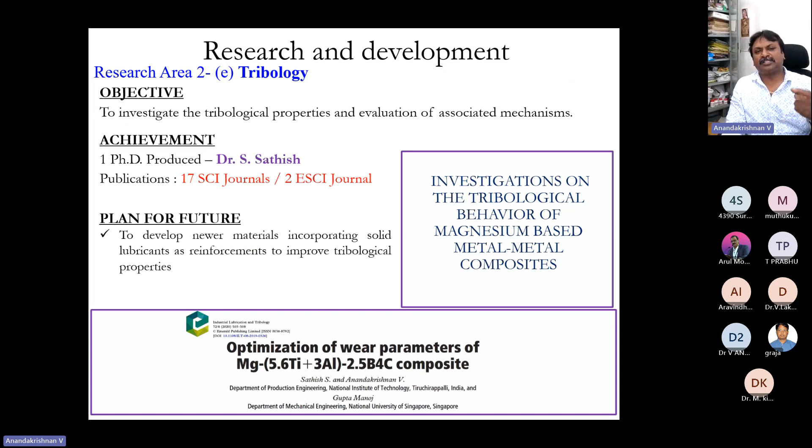Whenever we take an additively manufactured component, they will tell us, sir, please go and do some conventional machining on the surfaces and bring it, or otherwise my wire gets disintegrated and I have to work on that one. These are some of the difficulties faced, and these additively manufactured components have different tribological properties - friction. If you are going to additively manufacture piston rings or reciprocatory material, then you have to study deeply about the friction behavior and the wear behavior of that material.

So we have done some work also on developing newer materials, or the process is modified, or a new kind of composition is being brought in - that's a challenge. So these are a lot of challenges what I told about.

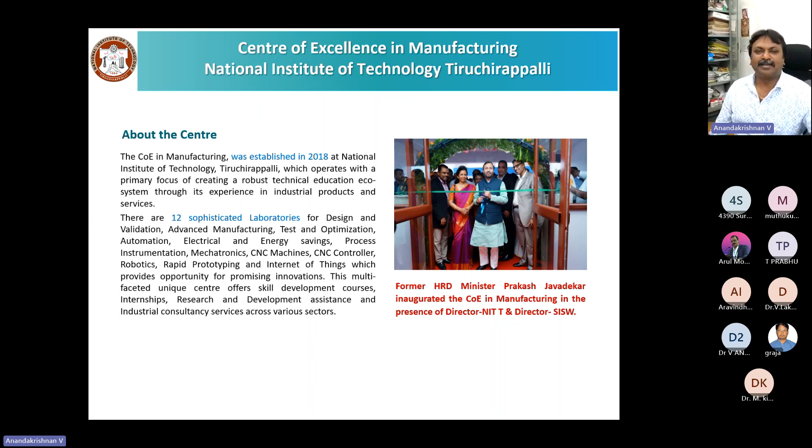I'm sorry, I have taken too much time. There's a Center of Excellence in Manufacturing in NIT Trichy inaugurated in 2018. I have two slides to show. It was inaugurated by Prakash Javadekar, the then Minister of Human Resource.

And we are signing MOUs with different kinds of institutions, education institutions, industry - we signed MOU with Siemens Center of Excellence. Now it is being called the Center of Excellence in Manufacturing. We have a lot of facilities like software for design validation, advanced manufacturing simulations, testing and optimization, robots, CNC machines, prototyping, rapid prototyping, additive manufacturing.

Along with that, we have robot training, all these things. 3D printing is also available with that. So anybody interested can utilize the facility. This was just for an introduction.

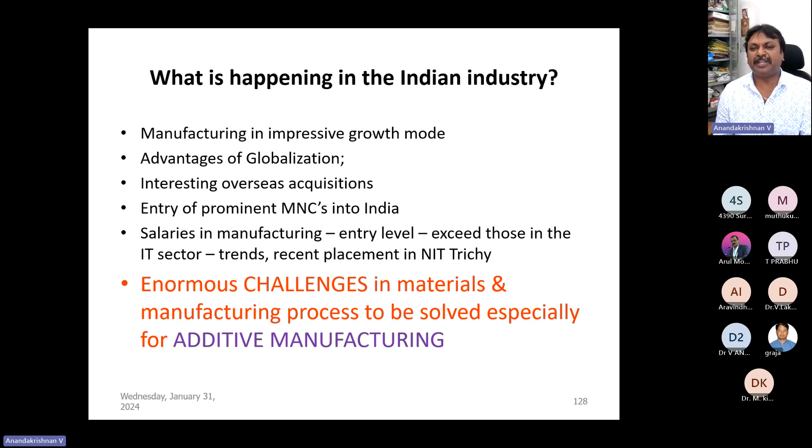So it is open - when there is a lot of problems, a lot of engineers and scientists are required to solve the problem so that we can solve all these problems for the next generation to move forward, so that we can make the country a developed country, with all the manufacturing technology being carried out indigenously inside the country. If you could manufacture, then we will shine in the world, like how India was named for the manufacturing of vaccines. We need all the technologies.

So for that, I think if students or anybody is ready with enough knowledge, what to do next is they need to go for a presentation in a symposium or conference, so that they can acquire some critical ideas, and including critical criticisms of experts, it can be addressed, and then it can be submitted for a book chapter or a journal, or sometimes it can be taken for a patent if it is very innovative.

And usually now, startups - there are a lot of funding being provided by government agencies, government of India, for startups. I have come across a lot of my friends, and I have been part of some screening committees also. Plenty - if you have a patent on your own, if you have your own idea to manufacture any kind of component, you will get endless financial support from most agencies, whatever it may be.

So I think thank you very much for this very late lecture. I have taken a long time. Thank you. So this is my email ID, krishna@nat.edu.